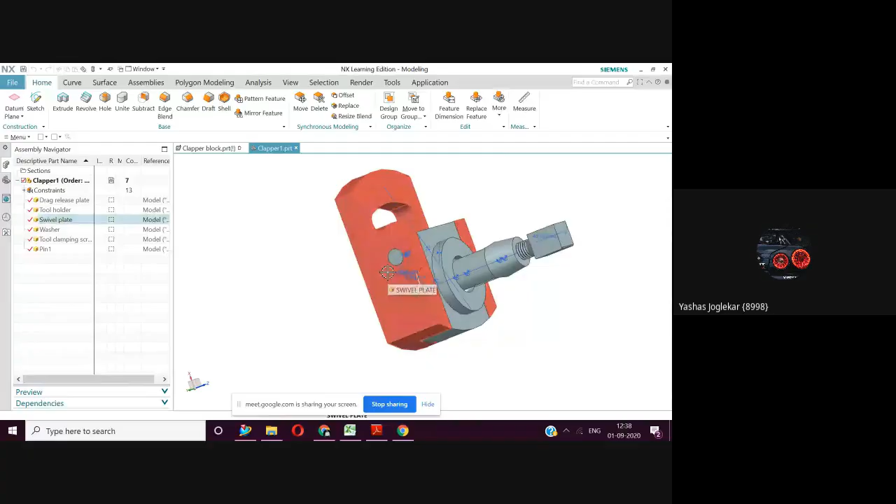Now once you have the assembly, how to make the 2D drawings? This is what we'll see first. Typical 2D drawings will look like this. You don't have to make these 2D drawings yourself; this software will generate them for you automatically.

Now here I am in drafting mode. So if I want to see the model, how do I see it? I go to Applications. Now I am in drafting, that is here.

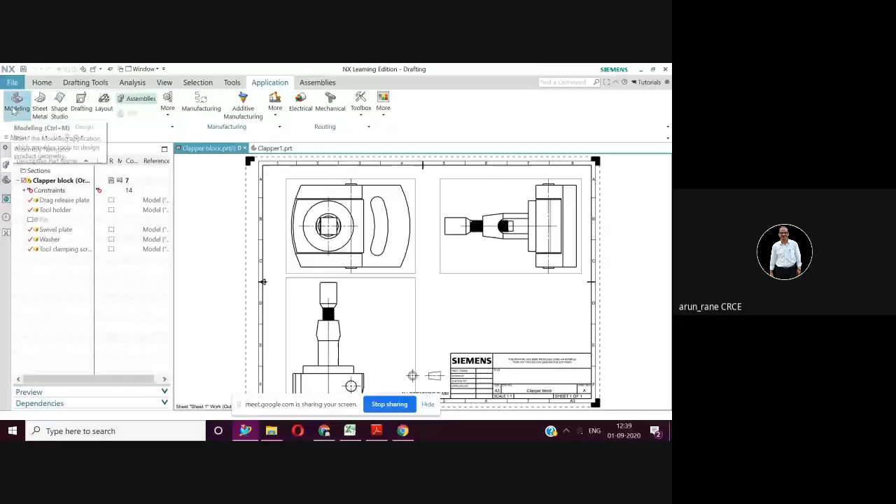From this software you have to learn modeling, drafting, manufacturing and assembly. These four are very important. I repeat: modeling, drafting, assembly and manufacturing. So how do I see this model? Here is the model, and you know how to color the model.

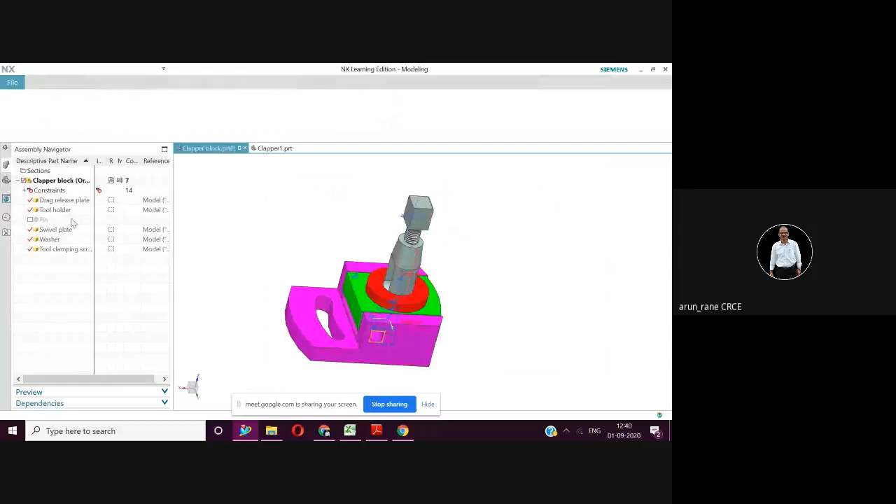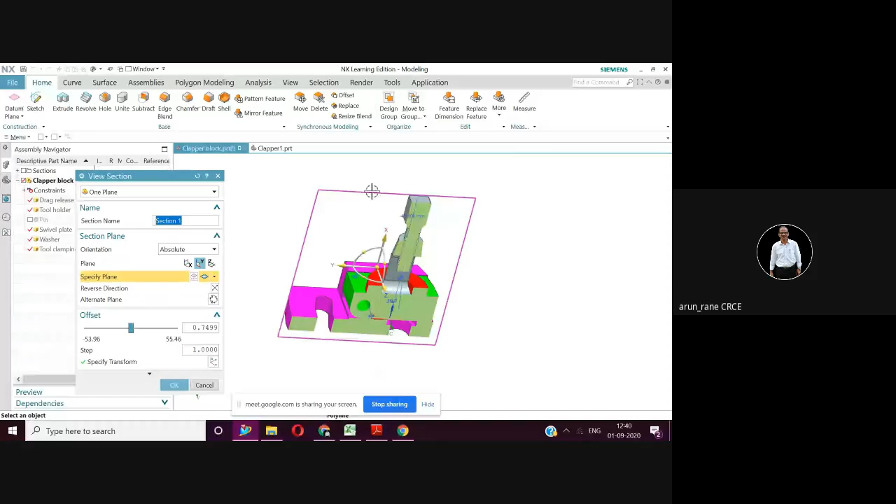Now, first, if I want to see the sectional view, how do I see it? I use the command Control H. Now you can take the section plane wherever you want, whichever angle you want, and you can see it.

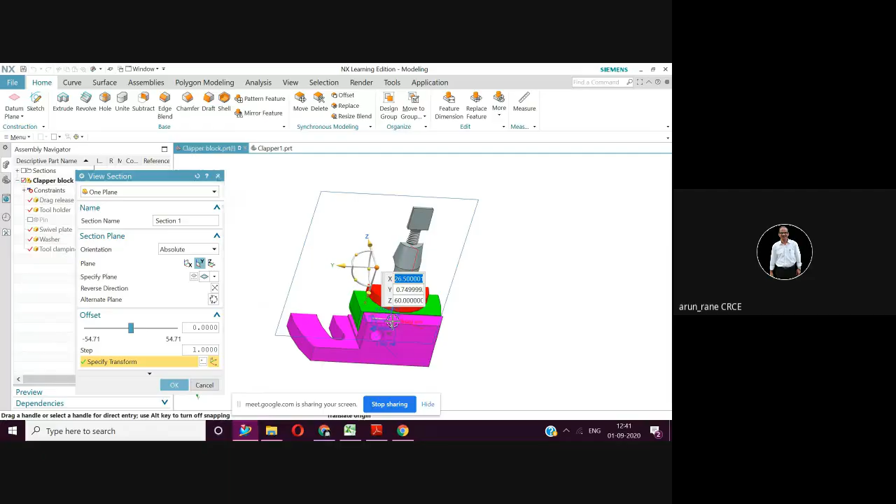Sir, your voice is breaking. What I said: if you want to see this section, you can use the command called Control H. With the help of Control H, you can take sections in the assembly.

Now let me go to the drafting. So how do I go to drafting? That is Application, then select Drafting, click at Drafting, then select the sheet. Usually you take an A3 size sheet.

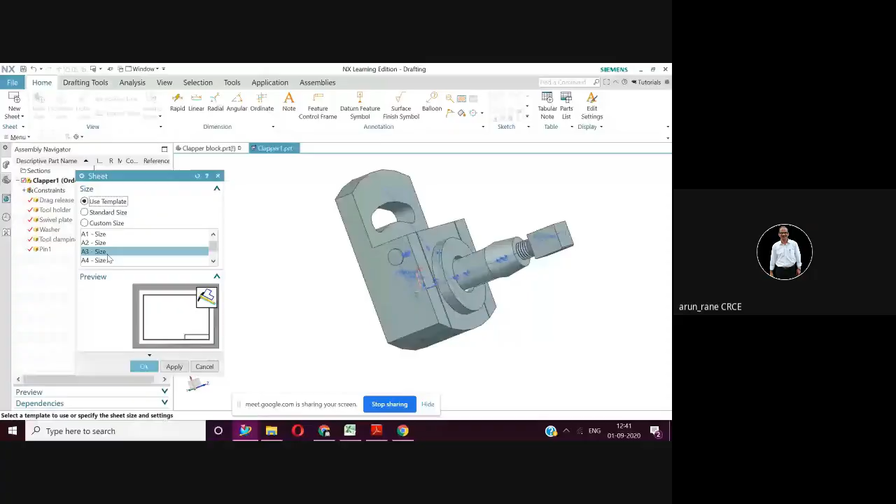Click at it, so you'll get this sheet. Now the sheet size is A3. You can go on adding here; you can fill in the details here, the template.

Now by default it is third angle; this is the symbol for third angle. You can write your college name, your roll number, your second year mechanical, third semester, etc. All these details you can fill in here.

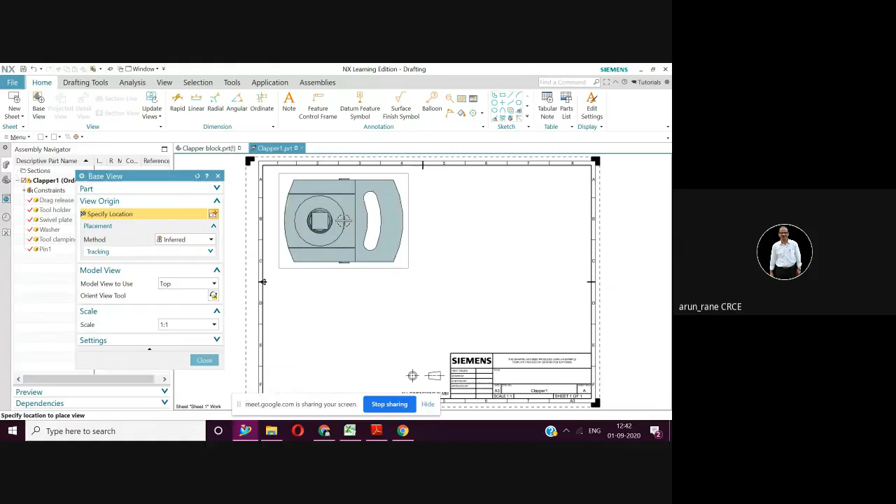Let me close this. Now how do I get the view directly from the 3D model? You have here Base View. Click at Base View, and with the help of a cursor, you keep the cursor wherever you want. So this is where I have kept the cursor.

Then I will also take the isometric view of the assembly. You will come to know why. I kept mine, so I got this isometric view as well.

Say open, I will take drag release plate. You have a preview here. Okay.

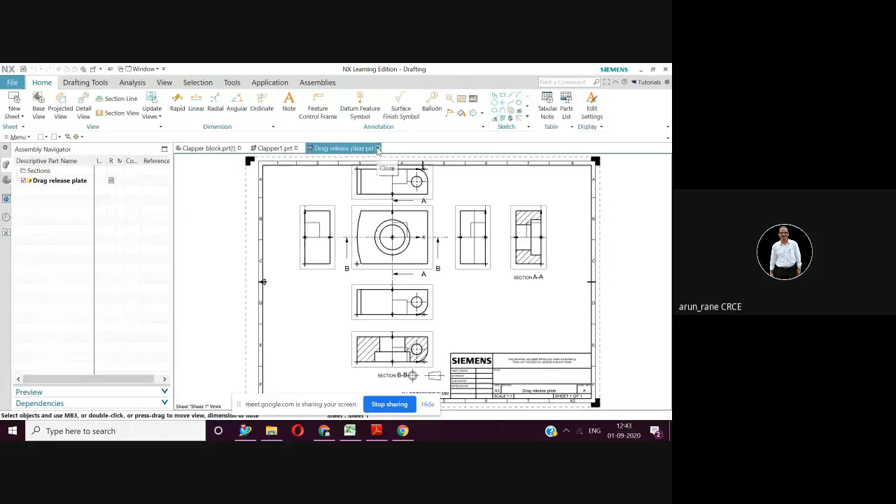Select it. Now since I already drawn here some views, I will take other component. So let me close it, and you have to close it from here. So file, open. Let me take swivel plate.

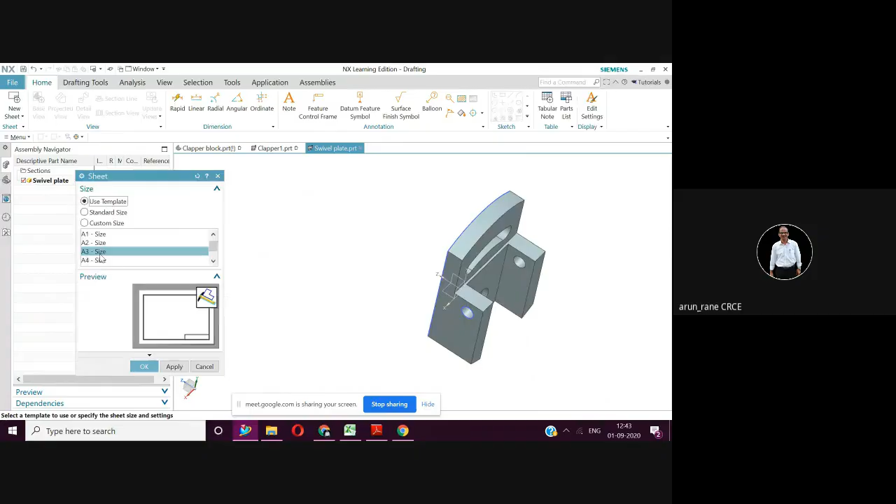Alright, go to application, select drafting, click at A3.

Now close this window, select base view, and place it here. Alright.

Again I will say Control Z, repeat, click at base view, place it here. I am placing it here so that I can draw one more view here. So place it here.

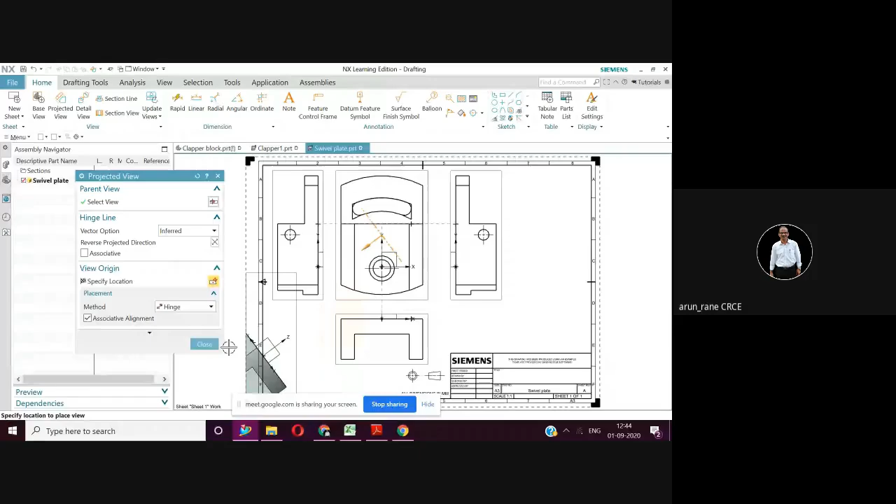Again move your cursor, place it here. Move your cursor here so that you get side view. Move your cursor here so that you get left hand view. Close this. So you have left hand view, you have front view, you have right hand view, and you have

top view. So once you have drawn these four views, you can go for sectional view. So here you can see section view. Click at section view.

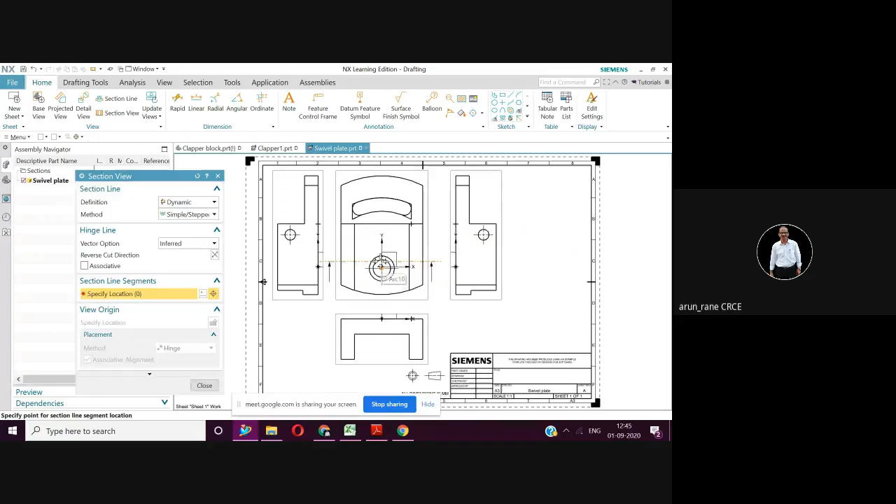So you will see this section plane. Just place your cursor and then you have to simply drag it, whichever view you want. So here you get your sectional side view.

Now suppose if you want sectional top view, so that is also possible. Just place your cursor, that is the point through which you want to pass the section plane, and drag it. So I'll just place it here.

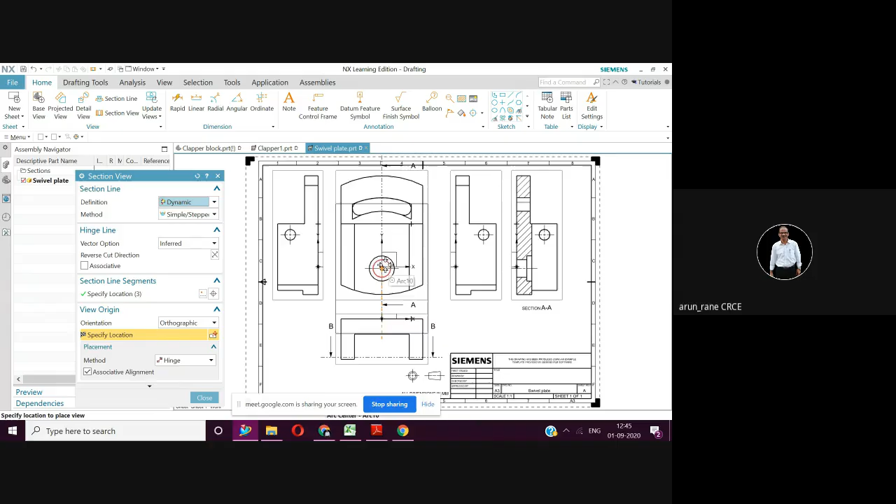Let us go on. Now I'll take section, incline section plane. So go to section view.

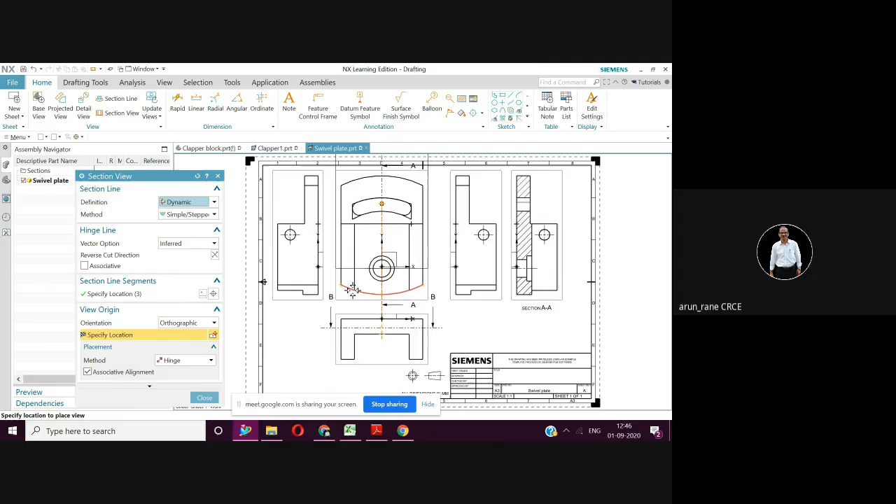Yes sir, you go to section view and select your plane at an angle and then just drag it and place it. You will get sectional view at an angle.

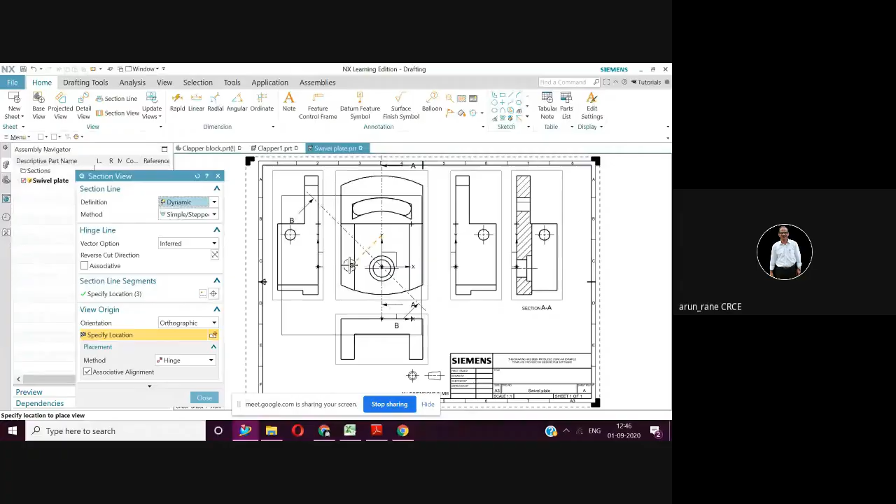This is how you get your top view, then your side views as well as your sectional views. You can save this under drafting mode and you still have model also.

So if you want to see the model, how do you see the model? Go to select modeling, so you can see the model. If you want to see the views, whatever you have drawn, so again go to application, go to drafting, and you will see the views here.

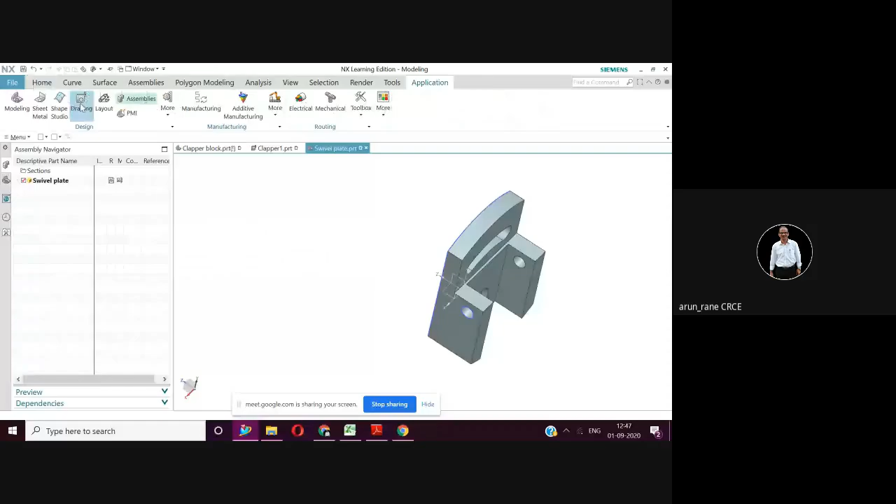Now, how do you name the different parts and how do you create the part list? Part list is nothing but the bill of materials. So I will just select the assembly drawing, that is clapper block. This is the assembly drawing. This is the colored one.

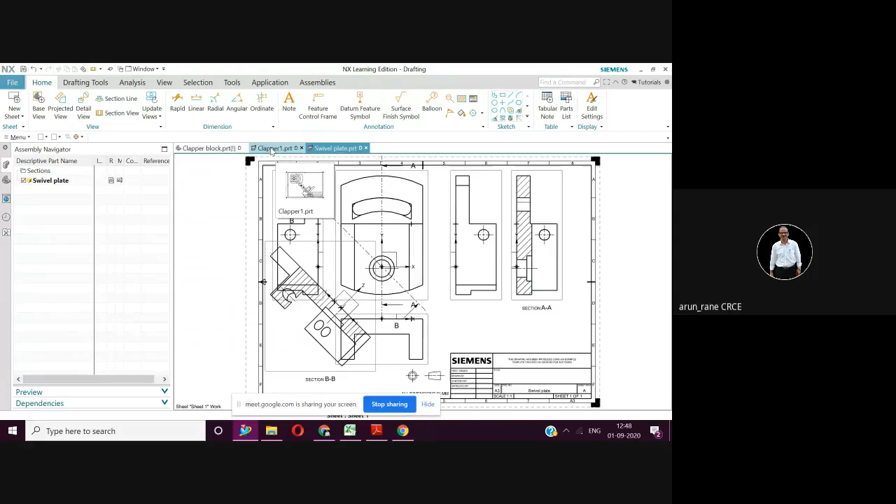And another assembly drawing, that is clapper one. Just now select thing, and this is what is your 3D model is, and how, and drafting, select drafting, and you have these views.

And the part list. How many components are there? How many components are there in this? Mayuresh, can you tell how many components are there in this assembly? Number of components, are you there?

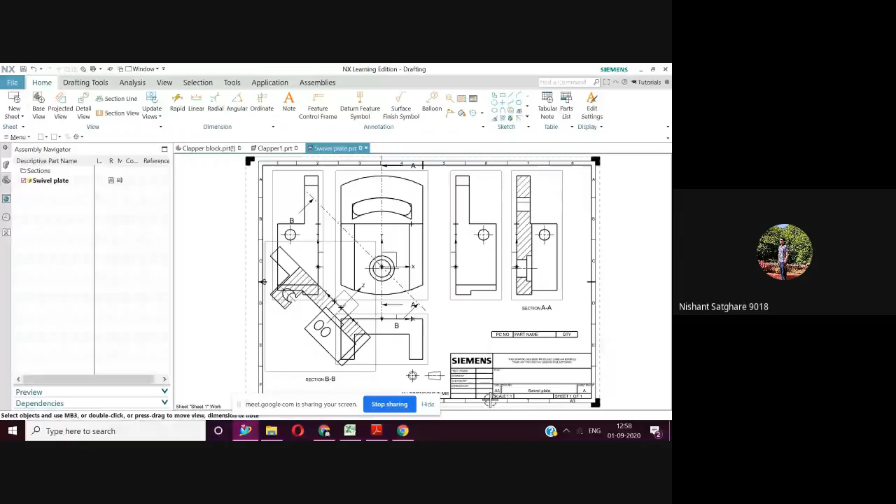So now in part list you will get only one component. So go to the part list. Okay, so you will get here one component. You understood this? Yes sir. Hello, yes sir, yeah. In Clapper there are six parts, that's why I got six. Six components, list of six components.

Alright, Nishant. Now how to give the numbering? The screen is visible, no, Nishant? Yes, sir, it is visible. So please say yes or no. Now how to give the numbering?

So go to balloon. Once you select balloon, then you click here, and you will get all these circles. Since there are six components, we will draw six circles.

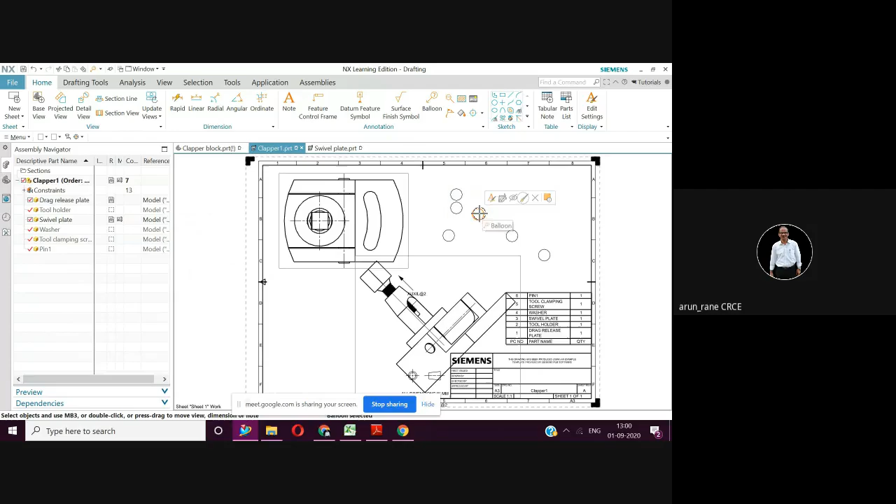Now don't close this window. Select this circle. You have to place an arrow here and click the circle such that you will get this window. Now the second option is edit here.

Now let me write down this part number one. So type here part number one. Part number one is drag release plate. So where is drag release plate? Keep your cursor here and the arrow will be generated automatically, the moment you click.

Now go to another circle. Type here 3, that is swivel plate. Click here to get that window, say edit, type 3. Then swivel plate is this. Keep your cursor here, click, and you will get an arrow here.

This command we will write now for tool holder. Select this circle, edit, type here 2, keep your cursor here, click, and you will get the arrow.

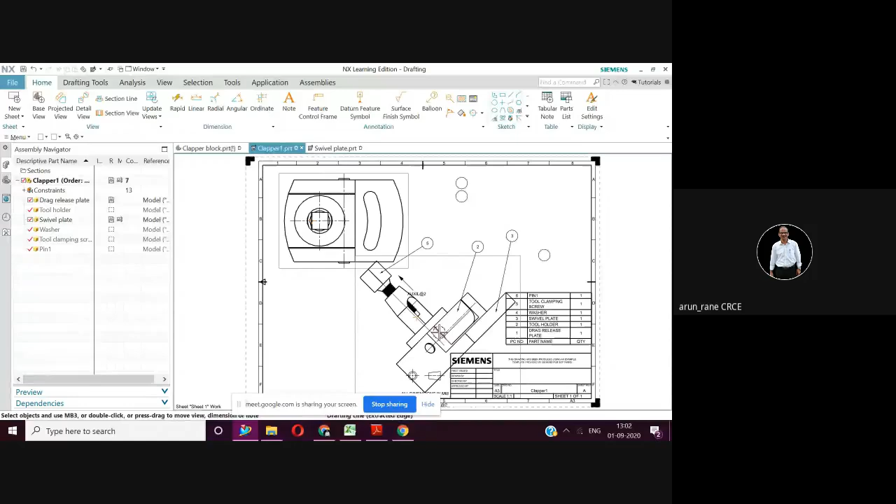So this is how your bill of material works. This is what the balloon command is. You can move it also wherever you want, like this. Now these two circles are joined because nut, bolt and washer - so that time you can use this, you can bring it closer. You can get top view, front view, then you can get sectional front view. You have to swap from modeling to drafting. If you want to save, you can save it.

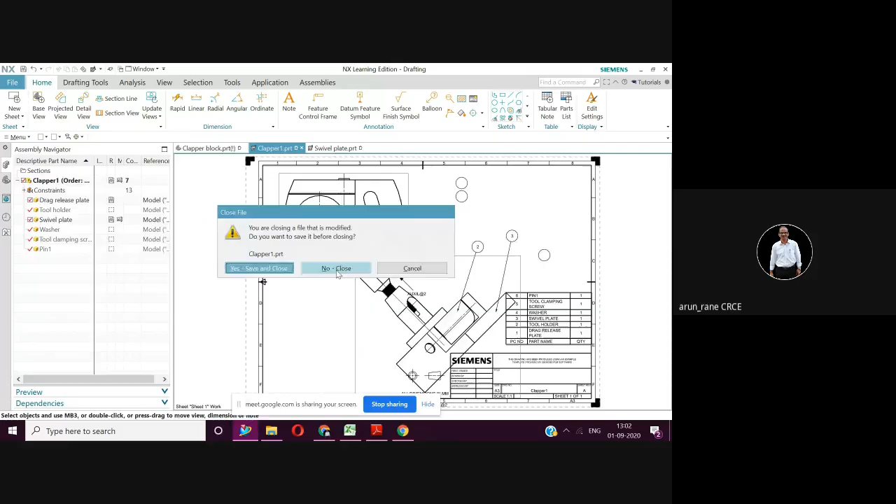Any doubt here in 2D drafting and bill of material and sectional view? Say no. Close this and close this also.

Yeah Nishant, hello, are you there? Yes sir. So can you just summarize what I taught now, just now?

2D drafting, that is how to get the front view, side views, how to get the sectional view, and how to get the bill of material part list. You selected the base view and then dragged the main front view onto the paper, and then you drag the top view below and the side view on both sides of the front view. Very good.

Then you section, selected those, and used balloons for the numbering. On the top there was the section view option - on top of the section view you place the section view on the right side using the section plane, so you can keep the section plane and get the sectional views.

Is this screen visible, Nishant? Yes, sir. It is visible. Yeah. Please bear for another 25 minutes. I hope you are not hungry. No, no, no.

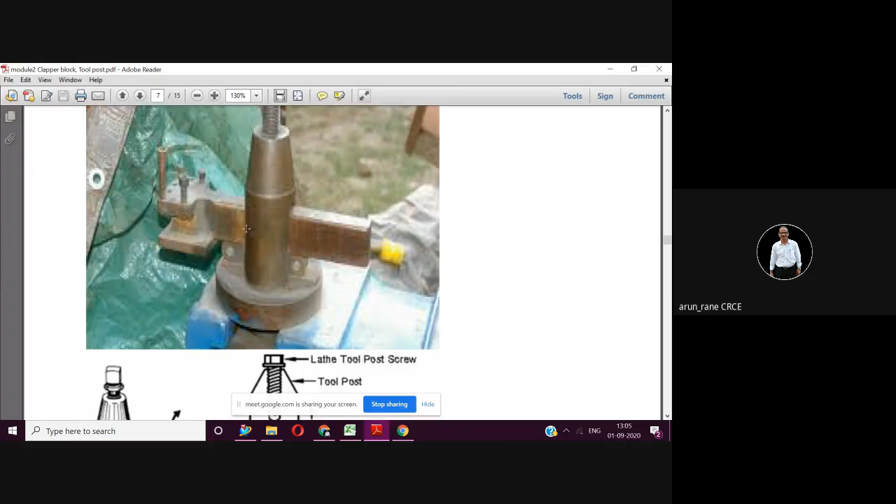So this is what the tool post is. This tool post can be mounted on the lathe. So now, what are the different components of the tool post? You have a block here, this square block. Then you have ring, that is this. Then you have tool post or pillar. Then this is a wedge, and you have clamping screw.

So I'll show you this view. The entire tool holder is mounted on a lathe machine. So this is a block, that is component number one. Then this is your tool post, that is component number two. Then this is ring, that is component number three. Then this is wedge, that is component number four, and this is your screw, that is component number five. All right.

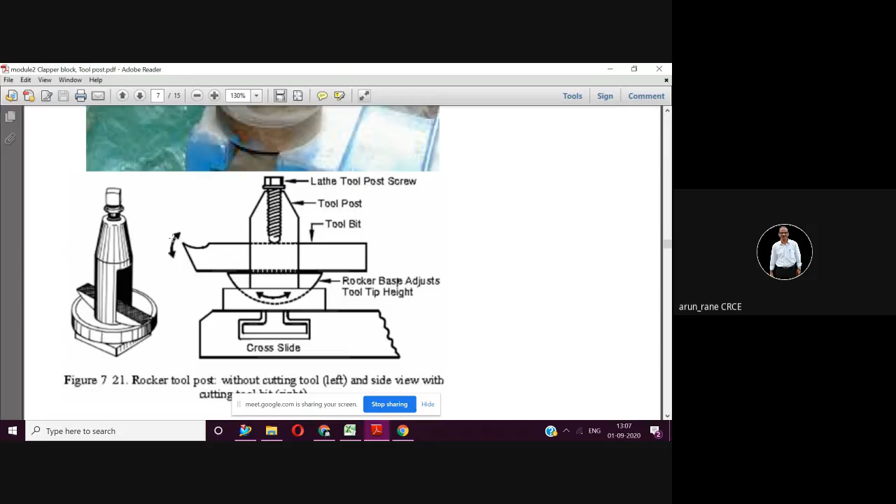So in lathe, your workpiece is here. The workpiece center line and tool center line should match. So if it is up or if it is down, you have to align this tip with the center line of the workpiece. So for that you have this wedge, that is Woodruff key. If you move this Woodruff key in this direction, accordingly your tool will move up or down, so that you can bring this tool tip exactly at the center of the workpiece.

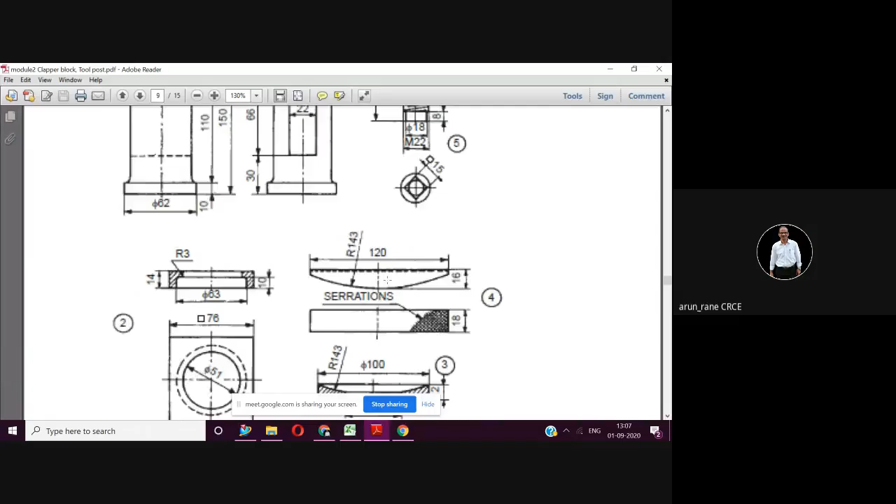Now don't refer to this sheet, you refer to this sheet. So these are the component drawings. Part number 1, that is tool holder. Part number 2, this is block. Part number 3, this is the ring which I was talking about. Part number 4, this is wedge, and part number 5, that is screw. Alright. Now you are familiar with the extrude key.

Now Nishant, are you there? Nishant, hello? Yes, sir.

So now this part number 1 can be drawn by extrude. You can draw many circles, corresponding to this circle, then this circle, then this circle, and inside circle, and then you can go on extruding. Instead of that, we can use revolve command. That is much faster. Initially you may think, how to do that? Before you use revolve command, you should have the half sectional drawing ready.

So this is diameter 32, so half of this will be 16. So you have to do some calculation. This diameter is 36, so half of this will be 18. This diameter is 50, so half of that will be 25. And this diameter is 62, so the half of this will be 31. And what about this length? This length is 150 minus 110 minus 10. So this length will be 30, this height from here to here.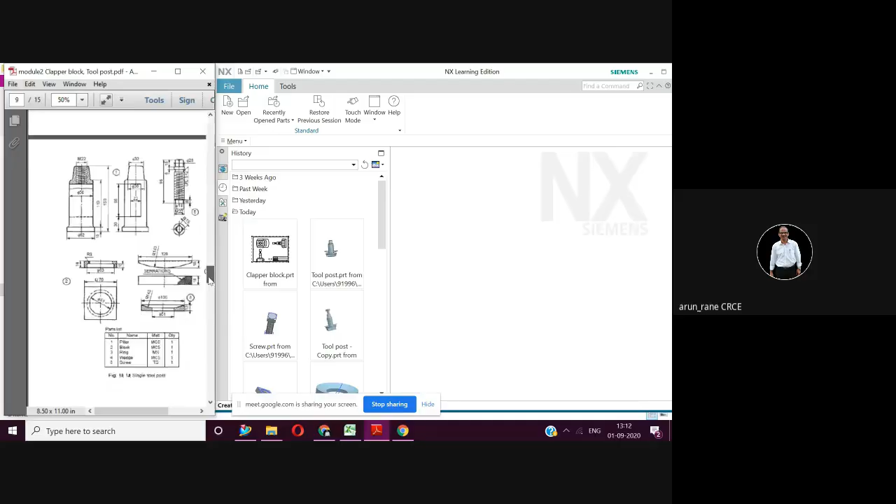Is the screen visible now? Hello, Nishant. Yes, sir. It is visible. You can see the drawing as well as the NX screen also, isn't it? Yes, sir.

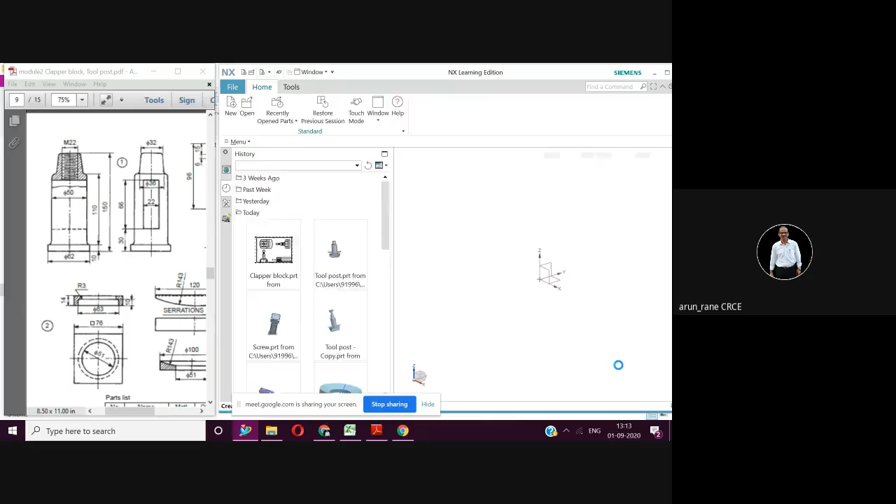So file, new, select model. This you know pretty well now. Folder I will select tool post. Tool post folder I have selected and model 1 I will name post or pillar post. Say okay. Now go to sketch. This is your family.

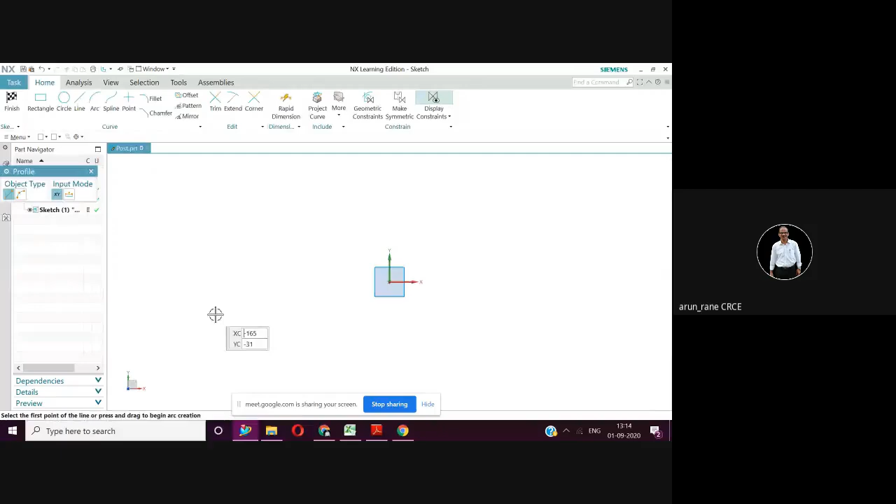So I am selecting a horizontal plane XY and let me say it's okay. Okay, now I will draw this half sectional view. This is my x0 and y0. So I am into sketch mode now.

So line, select line, and in line you have option coordinate and another option is parameter mode. So parameter mode will allow you to give length and angle. So I have selected this point. Now what is the length? This length is 32 divided by 2, so that is 16. So I will just type 16 here, then tab, and angle is 180.

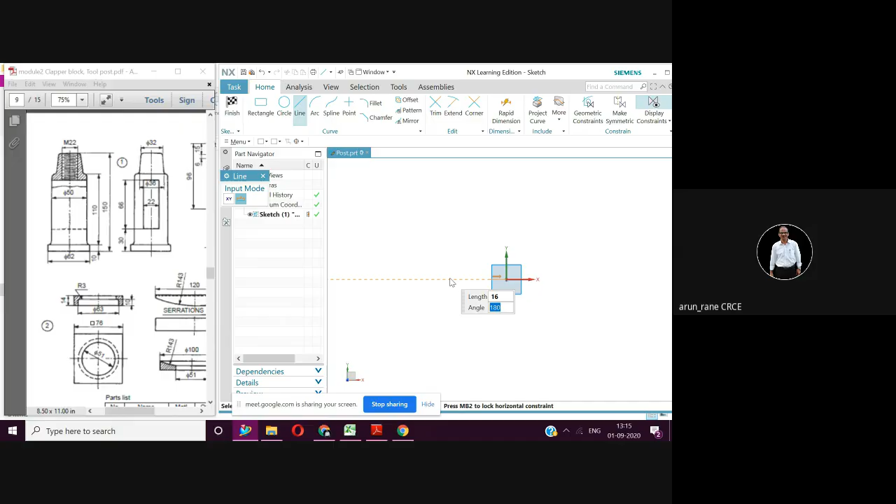You know how angle is 180 because angles are always measured counterclockwise with respect to x-axis. Since I am going negative x-axis, that's why the angle is 180. Enter. You got a line here. Zoom it, or you can say Control F. We can see this.

Then middle button and right button is for panning, and if you press middle button you can rotate also. All right, you have home button, that is shortcut key. You have end button also, and you can orient view to sketch also from here. So if you just move your middle button, you can zoom in, zoom out. So I got this line. If you don't escape, then you can draw also.

Now again I'll go to line in parameter mode. From this point I want to draw a line at an angle, and the length, as I told, I have calculated. I am going to show you revolve command, so little bit of calculation is required. So the length is 30.07, tab, and the angle with respect to x-axis in counterclockwise, that is 266.19. You may be finding it little difficult, huh? But actually this is simple.

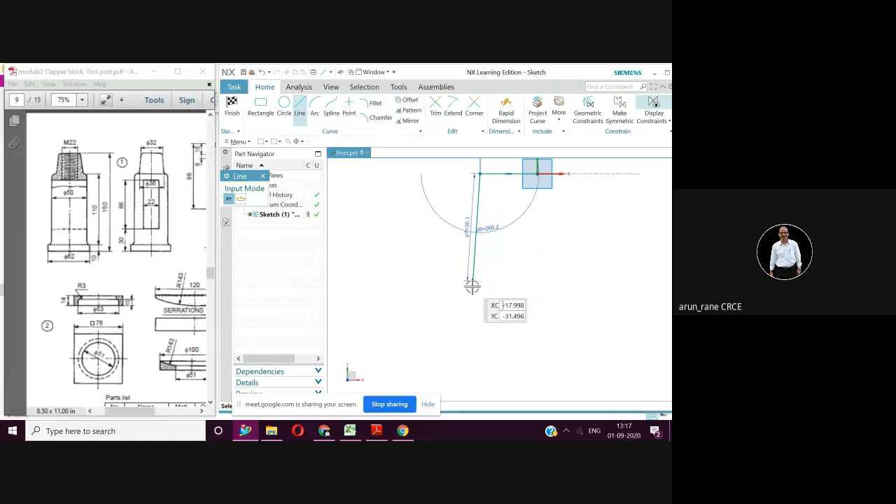Pan. You can use middle button and right button. Now I will go in this direction. How much is it? This diameter is 50, so half of that is 25, and this is 36, so half of that is 18. So 25 minus 18, that will be 7. Okay, so I already have this point.

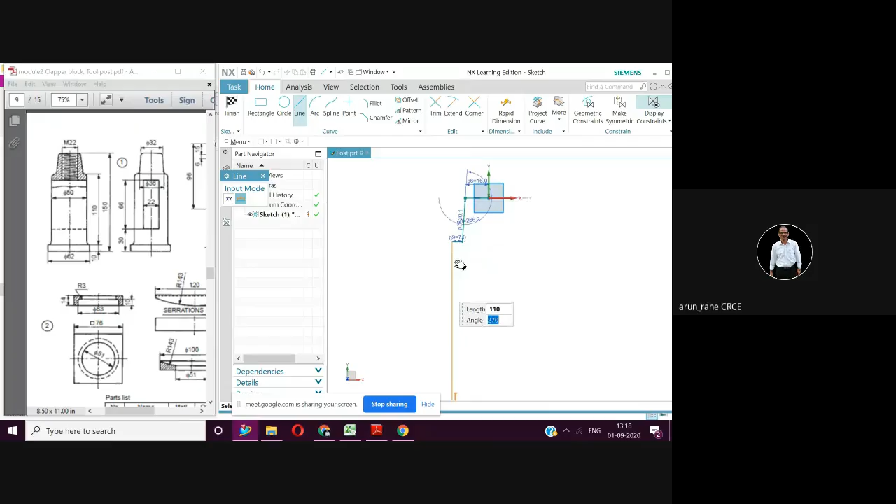So go to line, select this point. The length is 7 and the angle is 180. So type 7 here, 180, say enter. So you got this line. Now straight vertical line. So what is the length? That is 110. Come to the parameter. Just type in the length is 110. Tab. Angle is 270. Enter. We have this 110 length also.

Escape. Orient view to sketch. Now again, this diameter is 62, so half of that is 31. And this is 50, so that is 25. So the radial dimension will be 6, isn't it? 62 minus 50, that is 12, divided by 2. So line, take length of 6 mm and angle 180. Enter. Zoom it. See whether you have got the length properly or not.

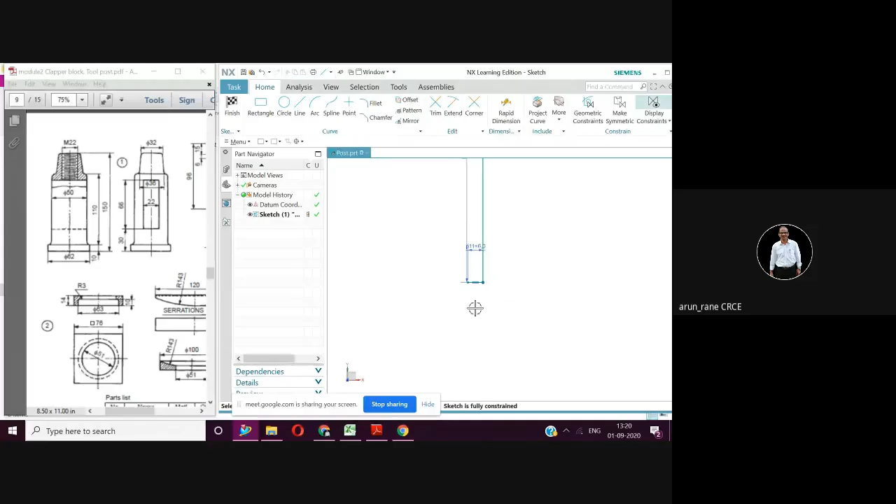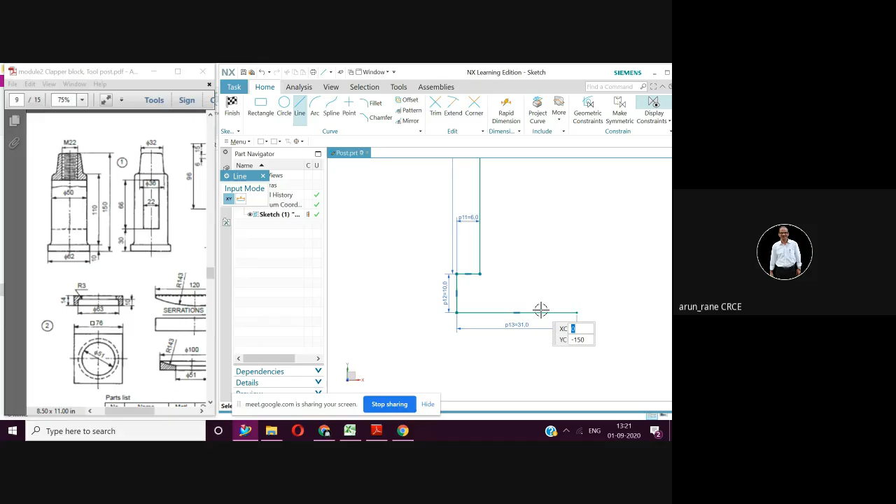Now draw this straight line of length 10 mm. So go to line, select this point, length is 10 mm, angle is 270. Again go to line. You can do continuously also, no need to escape. So now what is this length? This length is 31. Enter 31, angle is 0. We have this length, Control F, that is fit, and you can join this line now, from this point to this point.

Which will give you 150. So say 150 here. It is approximately 150, 150.003 it was showing, and angle is 90. Fine. So your sketch is ready. Now half the sketch we have drawn. There is no need to escape out of the line command; you can continuously draw. Now we'll say finish sketch. I'll maximize this.

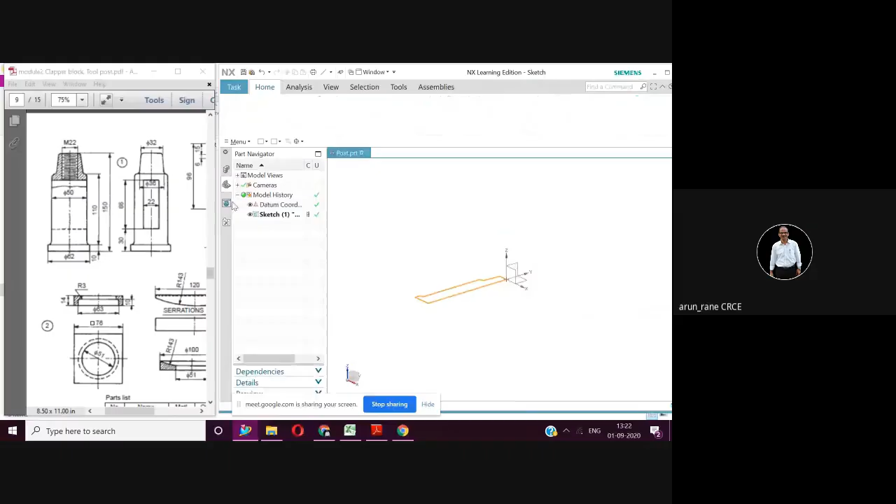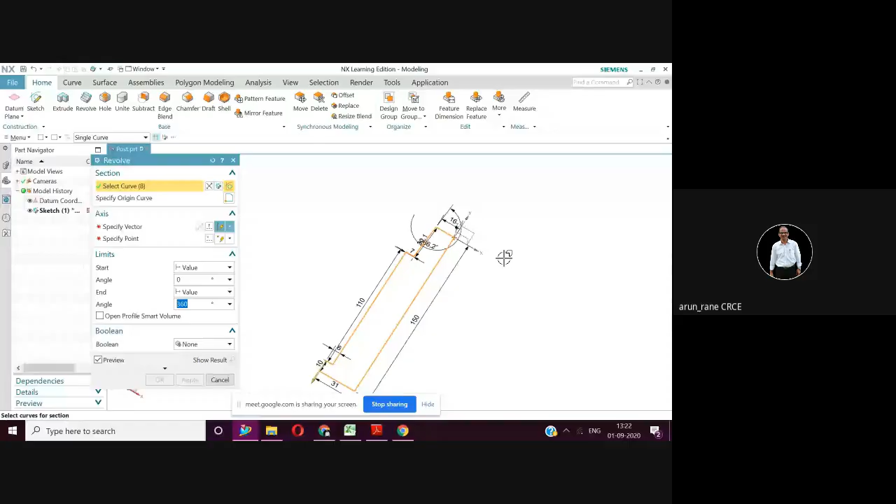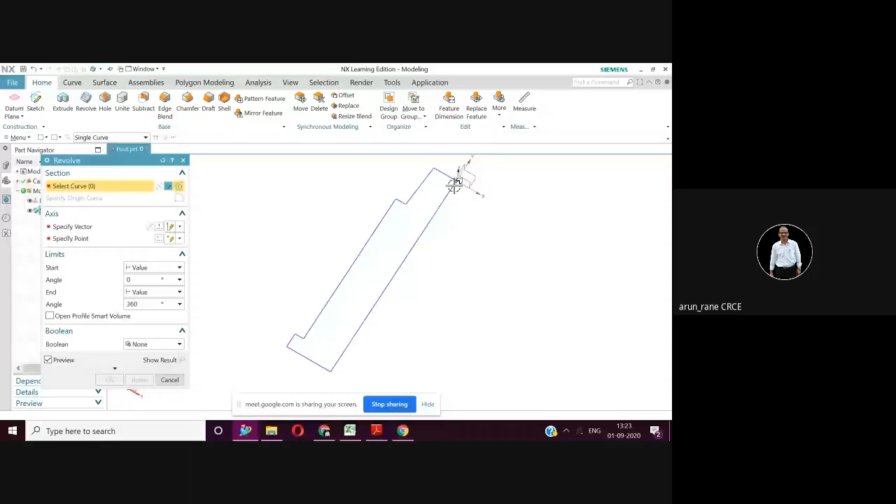Go to revolve. Now select curve, zoom it. So you have a single curve here. Now this curve is selected already, so reset, you have a reset button here. Go to single curve, select, select, select. So the curves are selected now.

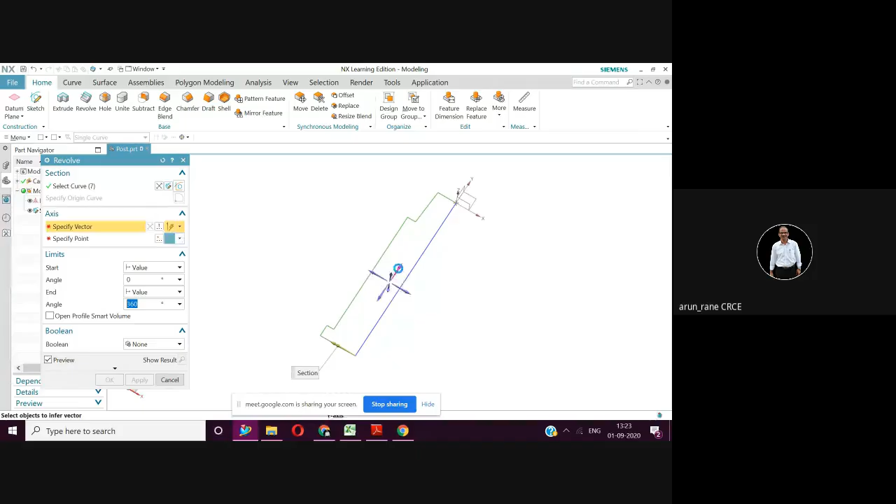Now specify vector, so along which direction you want to revolve. Now specify point, so around about this point, so you get this. Say okay. So you have this. Now you want to draw the slot.

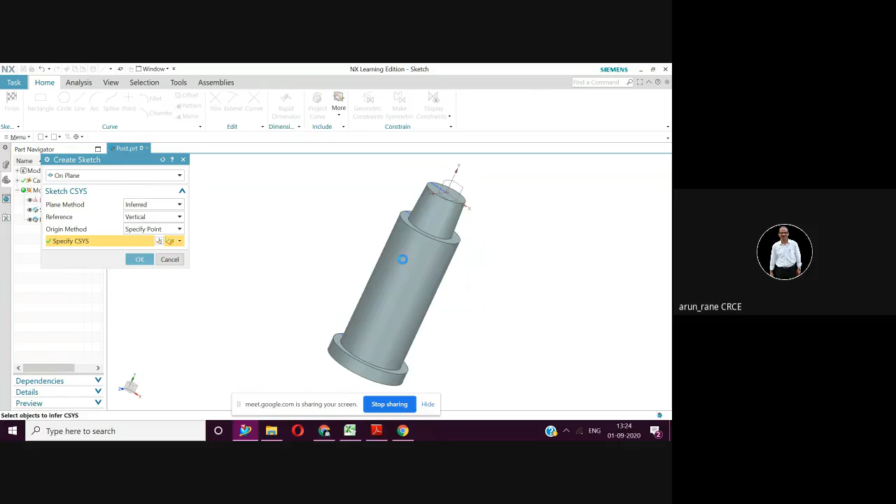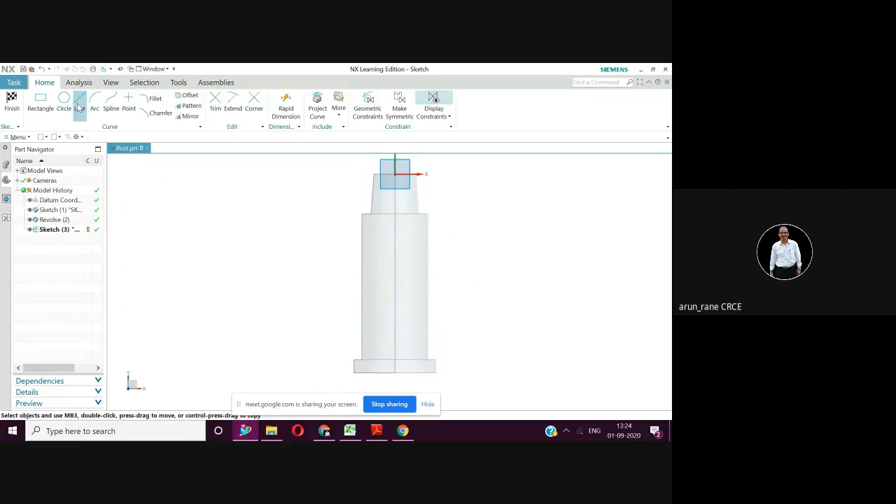So just go to sketch, select vertical plane, just click at this face, zoom it. So you have selected the face now. Now we will draw a rectangle here. So go to rectangle, just randomly draw a rectangle. Now what is the width of the rectangle? The width of the rectangle is 22 by 66.

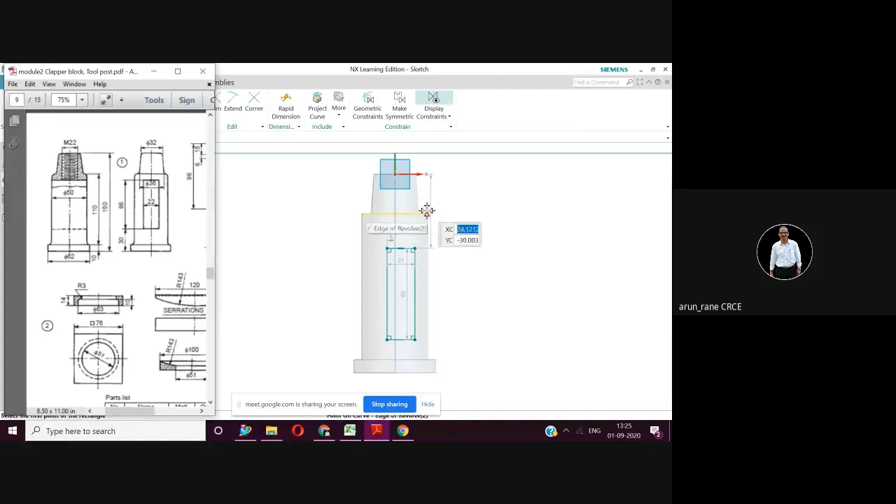And what is the distance? This distance is 30. So from the top it is how much? This is 30 plus 24, so from the top it will be 54. So I will just change this dimension. Or before that, I will change width. The width is 22. Enter. And the height of the rectangle is 66. Say enter.

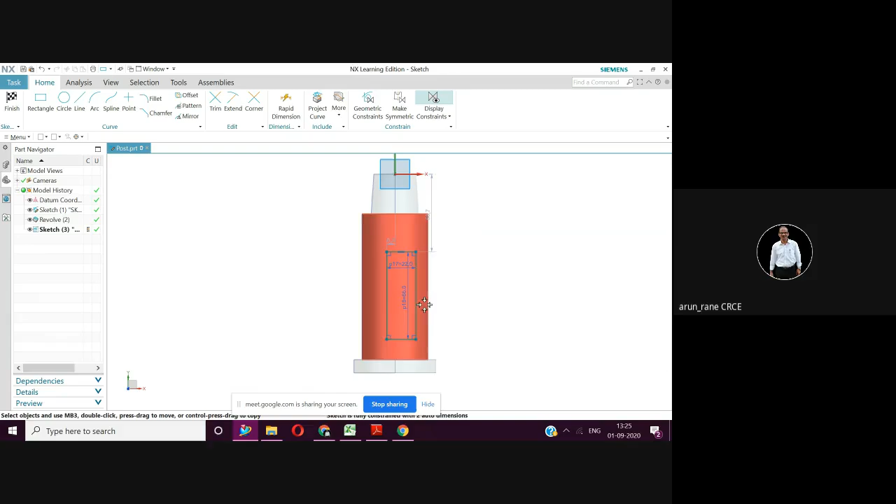Close it. Now we'll constrain in this direction and this direction. So now this 6.3 distance should be given. So I'll type this, enter. So now it is constrained at the center. Escape out. Now we'll fix up this.

So this distance is 54 from the drawing. It's also constrained, right? So now your rectangle is constrained. So we are given length, we are given width, and we are given this distance as well, with respect to center also. We have constraint around the center line also. So close it.

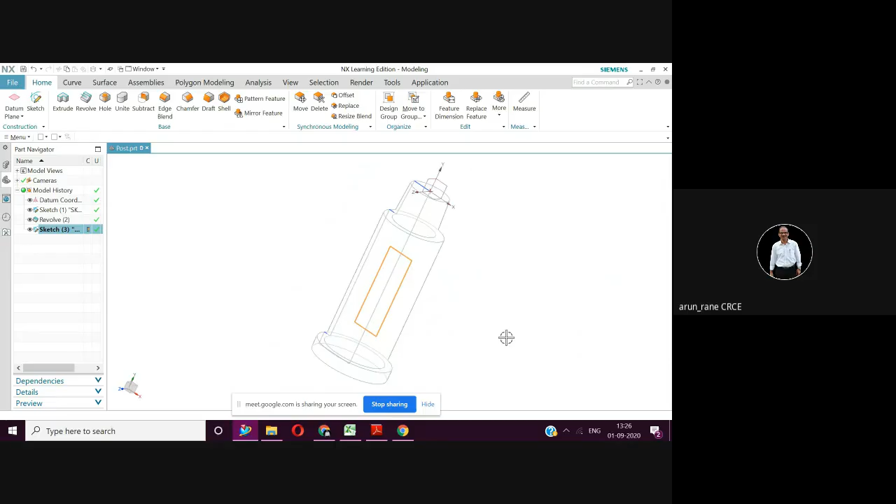So now we will extrude this. Now remember this rectangle has come at the center line. So finish sketch. Now you cannot see this rectangle. So go to rendering style. Select wireframe with dim edges. So here you can see now the rectangle is in the center.

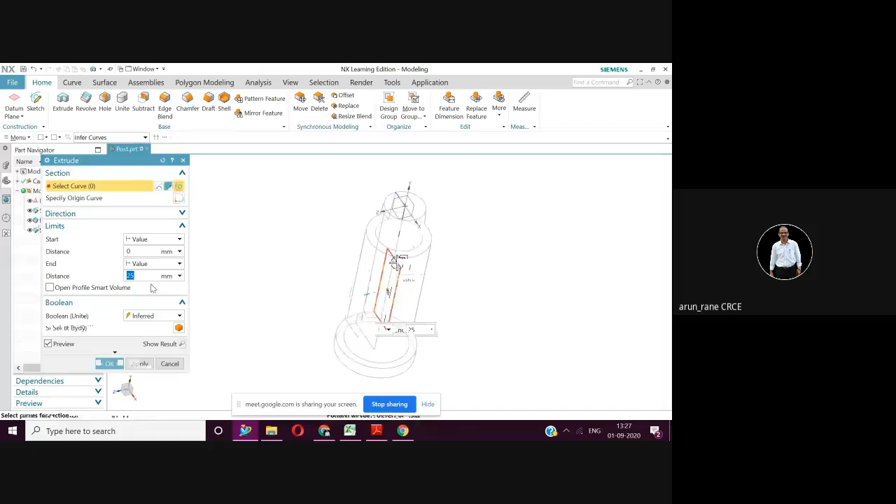So go to extrude. Select. Curve is already selected. If not, you can reset it. If you want to select it, reset it. Now select. So curve selected. Now this diameter is 50. Okay. So I will extrude from minus 25 to plus 25 or a little more. So minus 26 to plus 26. Fine.

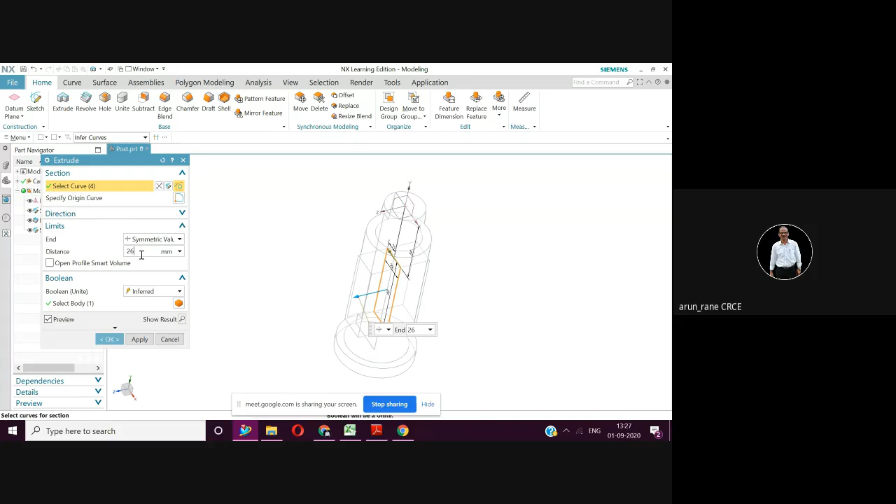So what I will do, I will go to this value, then symmetric, and I'll just say 26. 26 just for the safety purpose, so that it will come out 1 mm more. So no need to say minus 26 or plus 26, and say subtract. Okay. Now go to your rendering style, shaded with edges. Now you have this slot.

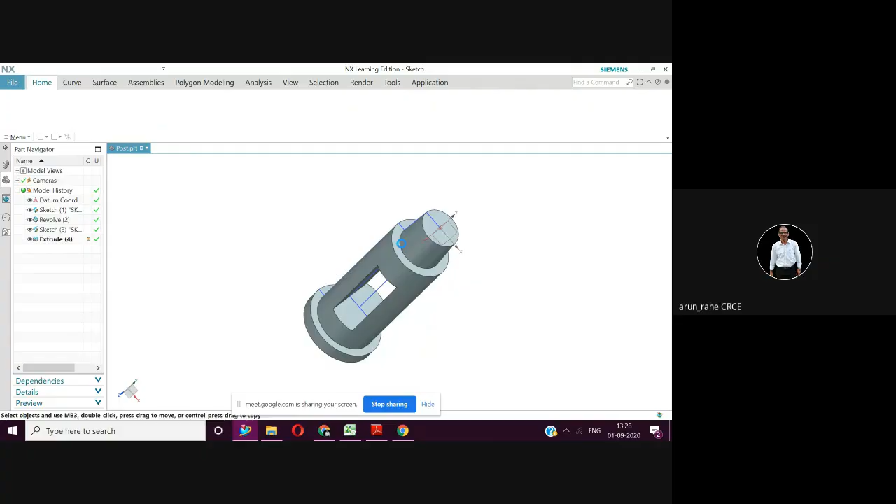Alright. Now we will draw this circle. How to draw this circle? Again go to sketch, select this face, horizontal, say okay. Now draw a circle. Now here the dimension is M22. So M22 by 2 pitch means you have to assume the pitch as 2. So the minor diameter will be 20. The diameter will be 20.

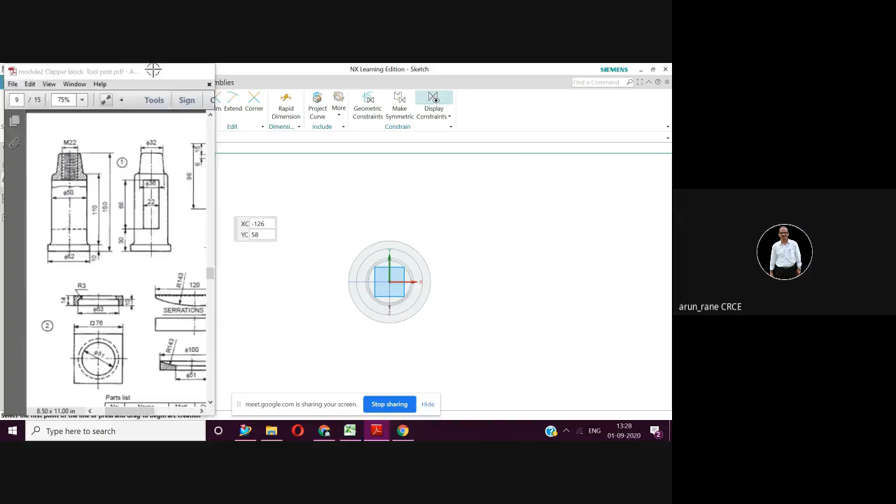So you draw a circle of 20. This is x 0, y 0. So I'll just type here 0, tab 0, enter. So circle is selected. And the diameter will be 22. Enter. I think the diameter given is wrong.

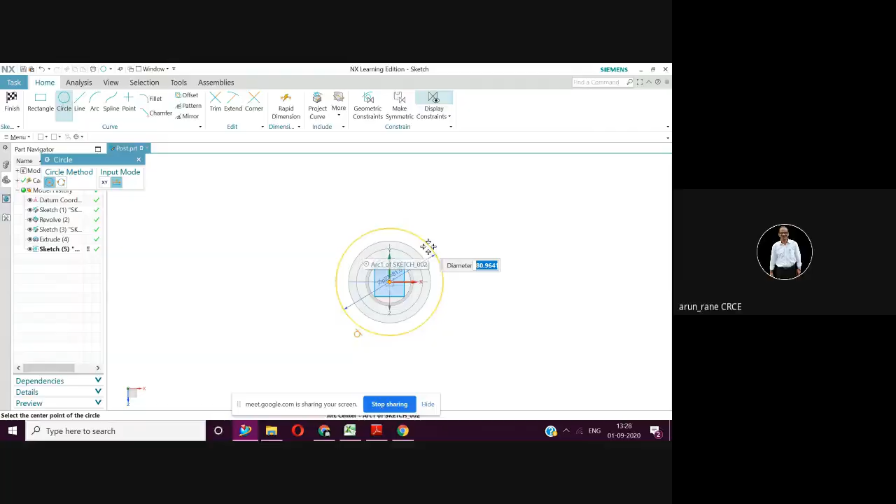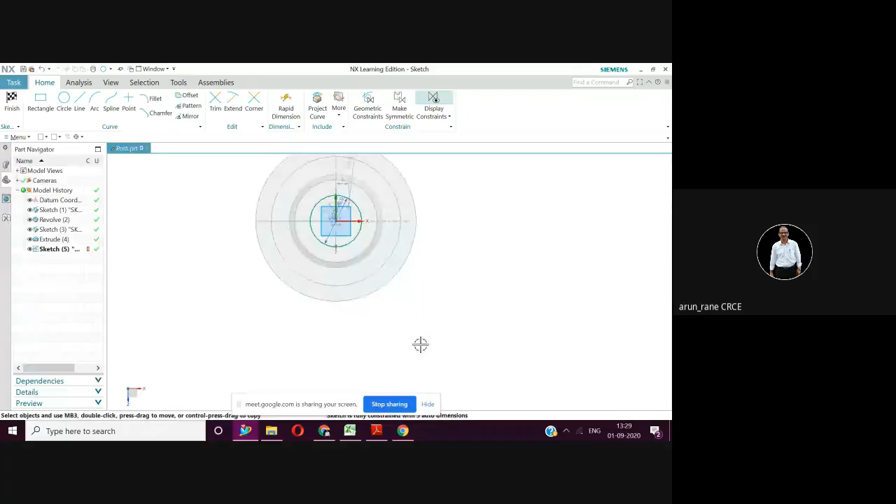Okay, so what we'll do, we'll double click and we'll edit that. Double click, zoom it, double click. It should be 20, isn't it? Now it's proper. Close. So you have this 20 diameter. Say finish sketch. Now you can see this circle at the top. Now we'll extrude this circle and subtract it.

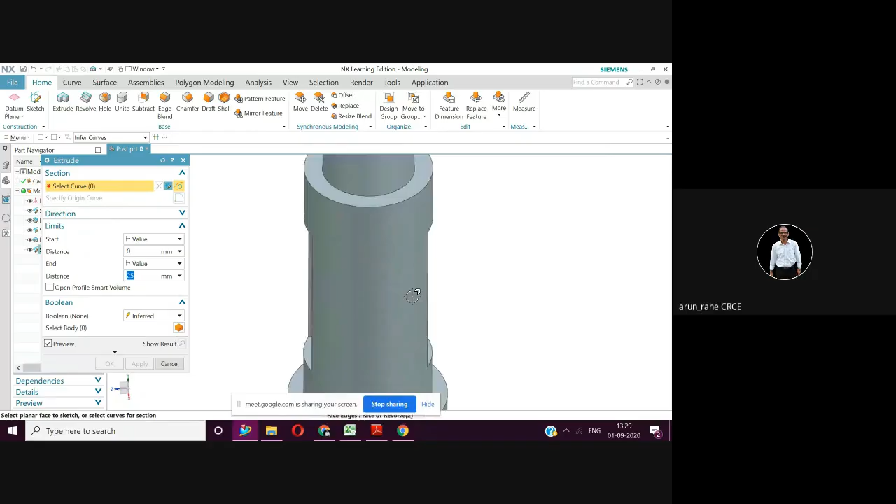So go to extrude command. Again reset it. If you don't want to see this, reset it. Select this curve. Zoom it. Drag it down, that is pan it down. Select the curve. Curve is selected. The moment you select the curve, it gives you the value. Now it will be 0. And what will be the height?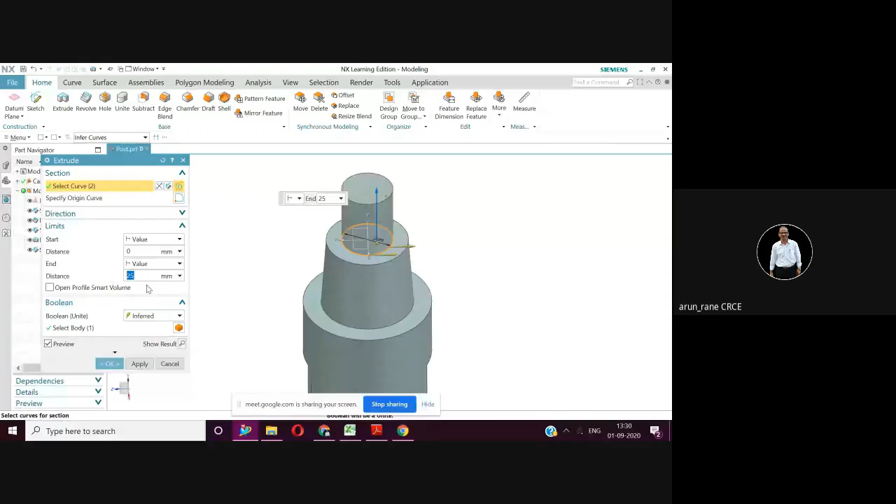Height will be 30 and 24. That is the start of the slot. So it will be minus 50. To be on the safer side, I will say minus 55. Then subtract. Say OK. Now your hole is also subtracted. Home. So the home button. You can rotate it by the middle button, or you need to right click and select the rotate command.

Now we'll do the threading. So how to do the threading? Go to the menu, insert, then design features, select thread. Now click at this face. Go for the detailed. Symbolic means you have the symbols in the drawing. Detailed means it will give all the dimensions and the thread will appear. Thread length 54, pitch is 1.5, and say apply. So now your thread size, you can change to 2 millimeter. So now threading is done.

Now what's left is this radius blending. So you go to edge blend. By default you select this tangent. Now radius. So radius, zoom it. Radius I just take randomly as 2. Now select this. So you have a 2 mm fillet. Say okay.

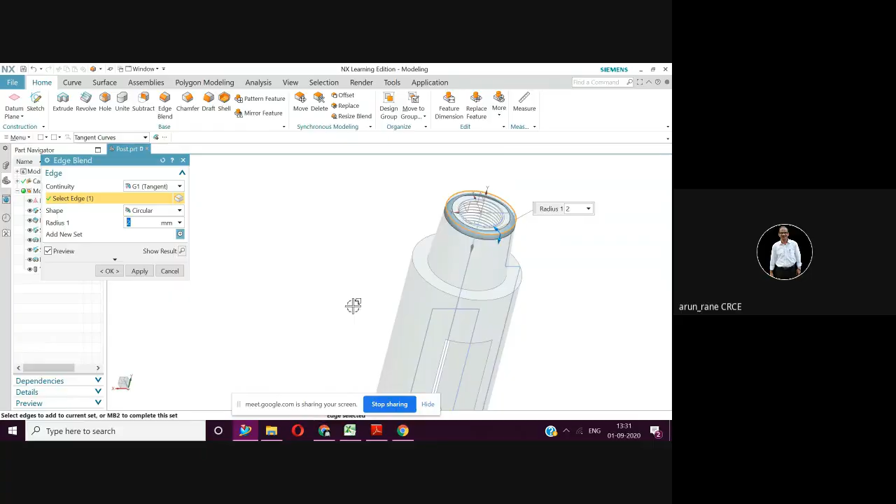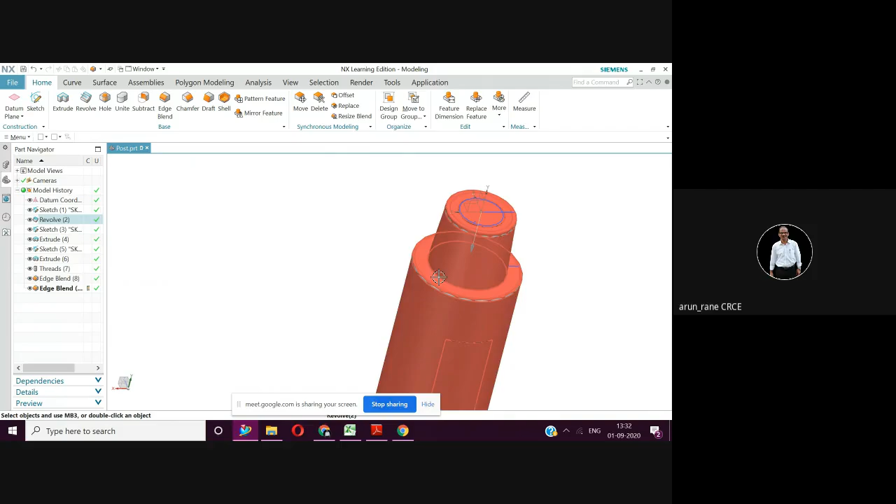Again go to edge blend. Select this. Now I'll give a radius of 1 mm. Say okay. Because this flat portion is less, you cannot give more radius. Again in edge blend, you can select, zoom it, edge blend, give 1. Now you have edge blend over here.

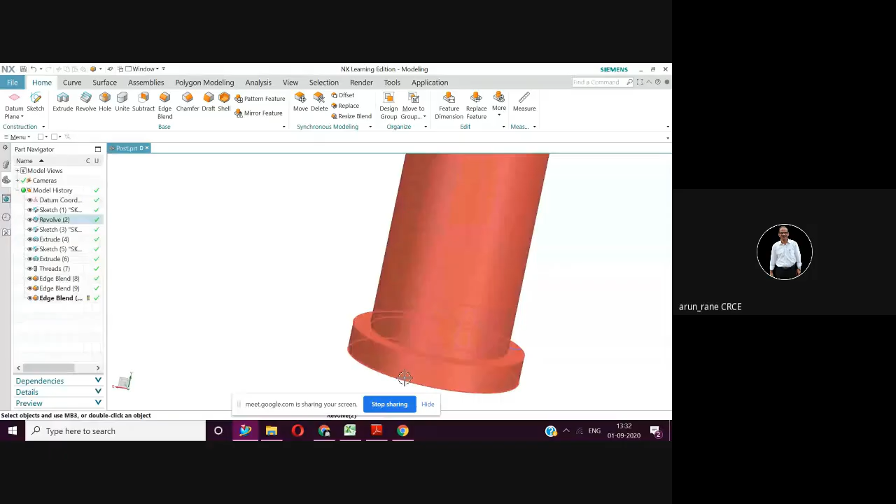You can do it at one go also. Select this edge, then select this edge and select this edge. But at one go, all radius will be the same. You cannot have the option. You may have to keep on changing the radius every time.

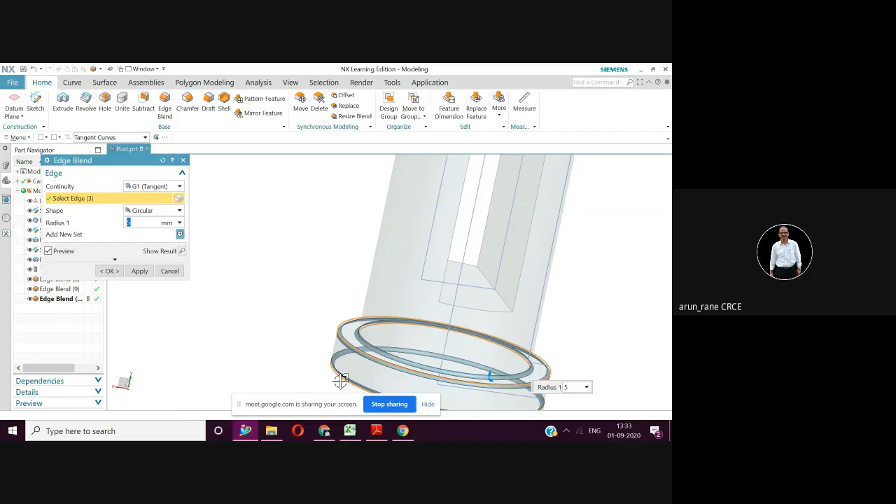See how I do edge blend here. Radius is 1. Then edge blend here. I'll change the radius here to 3. Alright. And then I'll select this and I'll make the radius here as 5 because it's a flat face. So this radius as flat. Select this. Now say OK. So in one go only you can get

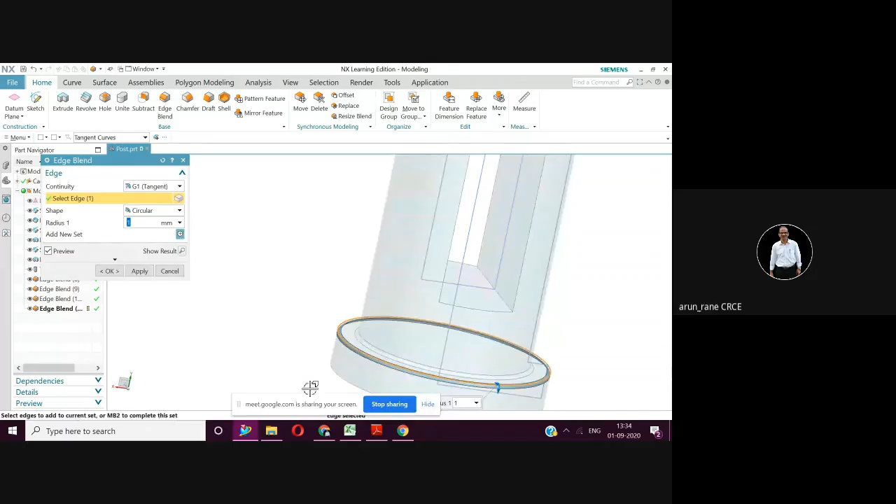blend faces overlap. Try blending the edges in separate features. Okay. Fine. So I'll say Control Z because the length was more. That's why. So let us go one by one. Okay. Edge blend. This. Say okay. And then bottom edge blend. That is the last. It is edge blend. This. You can change. You can make it 3 and say OK.

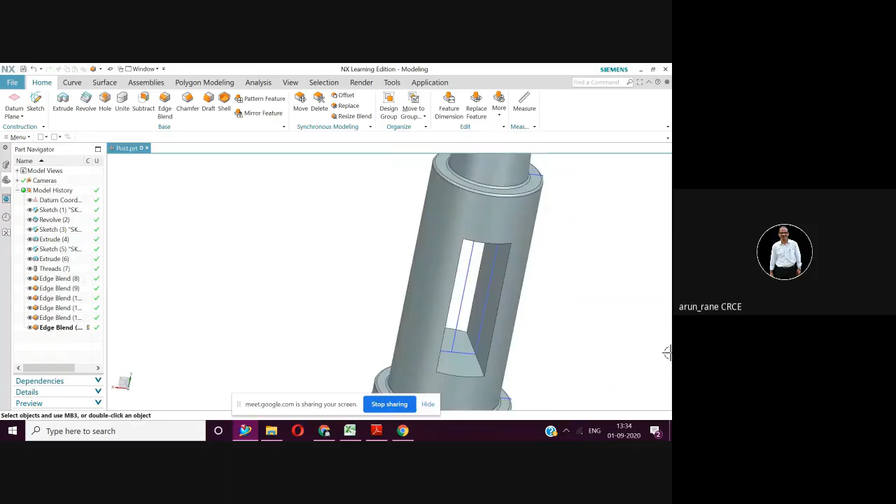So this is what your component is. Like I wanted to complete the component. Then say Control S. Now, if you have any doubt, please ask.

Sir, some of the dimensions are not there. How did you assume that? No, I have not assumed any dimension. Now you tell me which dimension you are talking about. Sir, this one. I have not assumed a single dimension except the fillet radius. Only the fillet radius I assumed. The angle, 266.2? The fillet radius I assumed because the fillet radius is not given in the drawing.

Sir, the above line, it is inclined, no? So you have taken it. That's what I said. When you are using the revolve command, you have to keep a drawing ready, that is, the sectional drawing. The half view you have to keep ready. I have not assumed. See, now this is 32. So half of 32 is 16. Okay, this is 36. Its half is 18.

Okay, sir. And this height is how much? 150 minus 120, so that is 30. So you will get a right angle triangle of this 30 height, and this distance will be 2. Do you agree? Yes, sir. So now you draw a right angle triangle. Its height is 30 and this length is 2. Now you join the hypotenuse, isn't it? So you can calculate this angle.

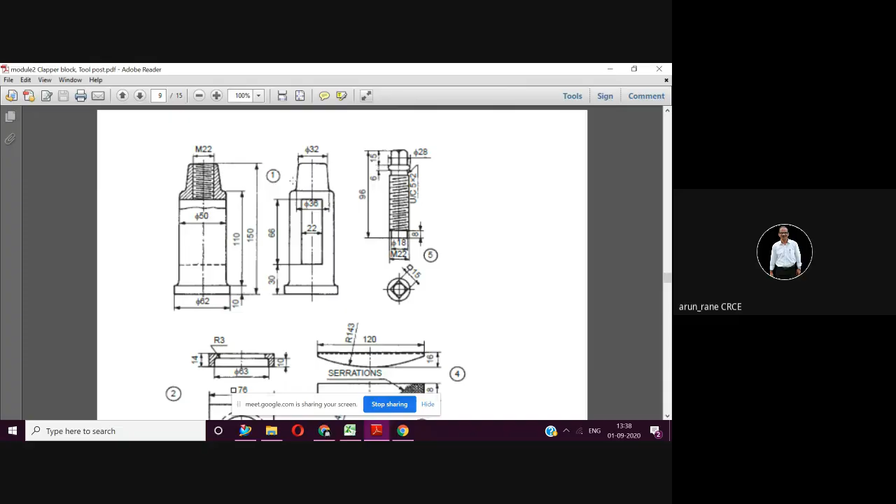So I calculated the angle. That angle was coming 86.19. To that I added 180 because we are going anti-clockwise, isn't it? So anti-clockwise it will be 180 plus 86.19. So it was coming 266 point something. So I have not assumed anything. Okay, sir. Did you get it, Bhushan? Yes, sir. Any other doubt?

No, sir. Thank you, sir. And sorry, sir, I wasn't responding to you because my phone was hanged at the moment. Okay. No problem. Anything else? No, sir. Okay, fine. Shall I stop the meeting?